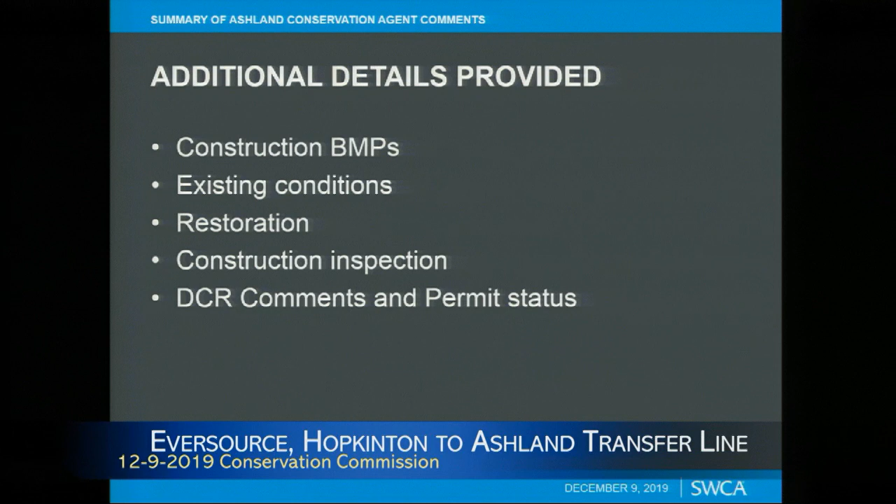So with that, I'll start off with the construction BMP side of things. When we last met, there were many questions about how construction was going to take place within some of the wetter wetlands, specifically the wetlands around Cold Spring Brook, and the wetlands between West Union Street and Ashland State Park. There are two larger BVWs with associated floodplain areas there.

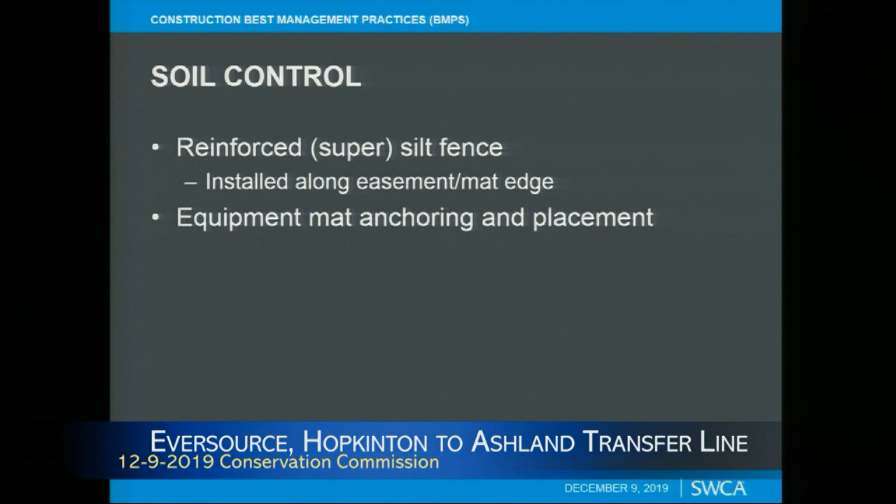So we went back and looked at some different BMP measures, and what we came up with was the use of reinforced silt fence, along with the continued proposal to mat the work area, using this reinforced silt fence to form a more rigid structural edge to the workspace that would be installed right at the edge of the mats, right at the edge of the workspace easement, to provide the maximum amount of retainage of soil within the work area and on the mats. We also addressed some questions related to how those mats would be placed and the anchoring of those mats within the easement.

I thought it would be helpful. Last time we talked to the commission, there was a request for some photography to show some of these items, so I have some photos for you to give you a sense of some of these particular BMPs. This photo shows what this reinforced silt fence would look like.

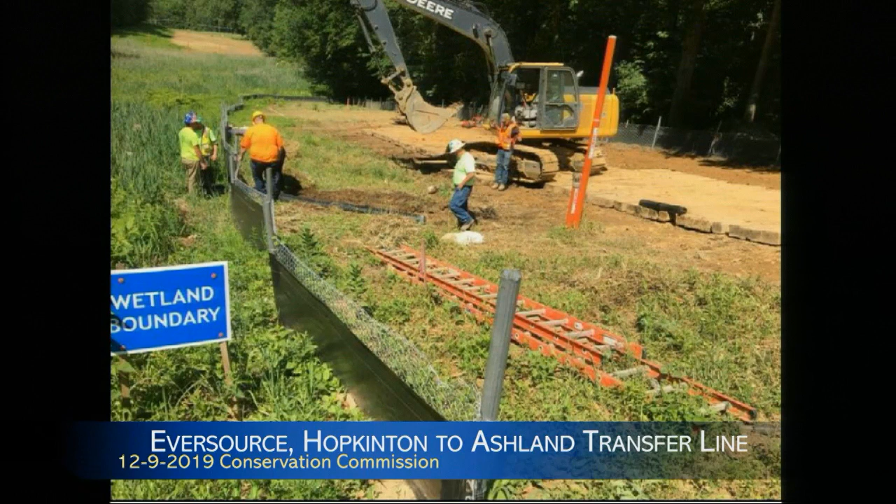It's basically taking a taller silt fence and attaching it to a chain link fence at a low level, but giving it rigid reinforcement, and that would be laid in right along the right-of-way. This particular photo is from a different project, but it was an installation of super silt fence along a pipeline right-of-way. In this instance, it was used because this crossing was in bog turtle wetland habitat, so it was important to provide a very definitive barrier to keep wildlife from moving in and out. This photo shows installation of that super silt fence along with some mat placement.

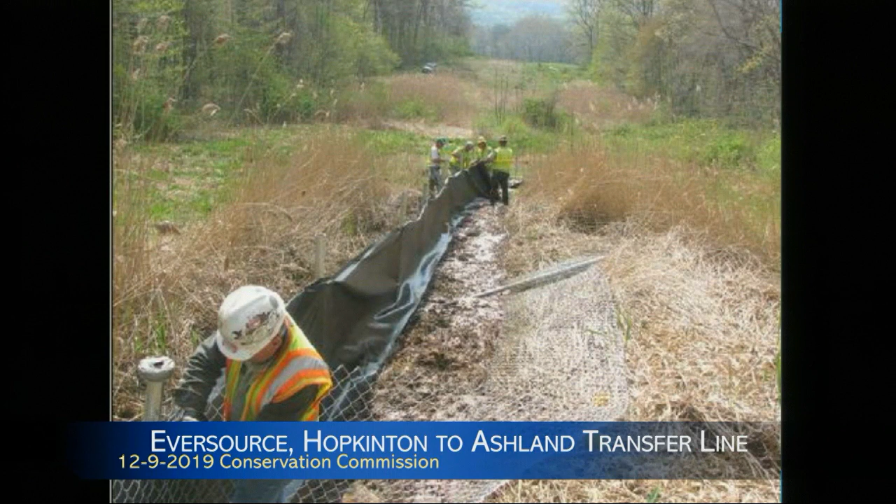This is another photo showing the laborers actually putting the fencing in along the edge of the wetland workspace. Finally, this is after the installation has occurred, defining the uplands and the wetland areas along here, showing the BMP usage within this easement. In this case, this is a large, pretty wide pipeline easement.

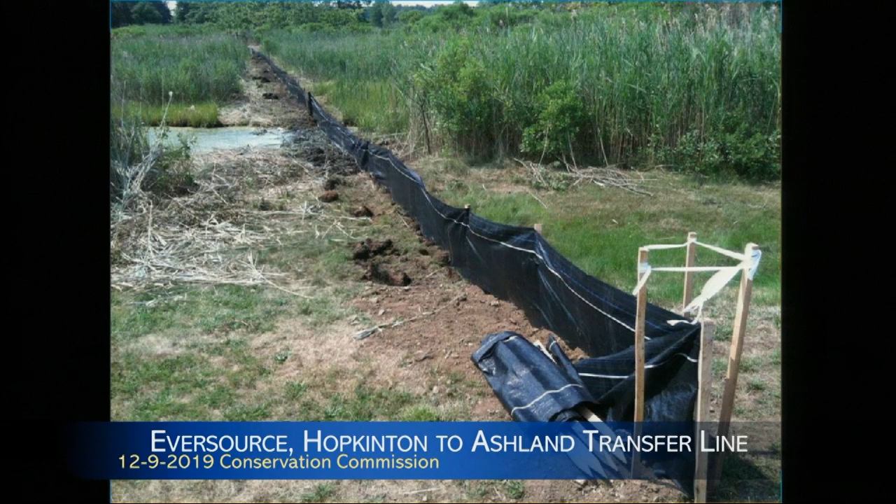I put this photo in here to show normal silt fence installation, but there were questions about whether this could be installed in wet areas, really wet areas. In this case, this was going through a marsh habitat, and the silt fence was being installed through there, so that's why I put that one in.

Now, one of the other questions that came up from the previous hearings was about past construction, and Sean, the project engineer, was able to go back into the archives and dig out some photos from the 2002 timeframe, when there was a beginning segment of the transfer line in Hopkinton that was installed as 12-inch.

So I just want to touch again on the use of equipment mats. I know there's many questions about that. We consider it a standard BMP for constructing linear projects in easements to avoid rutting up wetlands, and from the equipment, providing a safe, stable platform for which the equipment can work from.

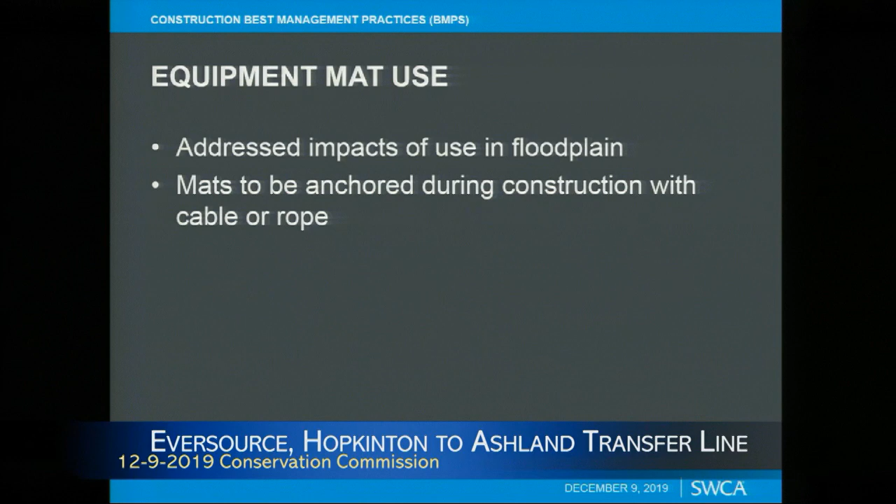And then other questions came up, well, what would you do in the case of flooding? It's typical to anchor mats, basically lashing them together to keep them tight, and then you can actually secure them to a tree if you think there's going to be some significant surface flooding that's going to occur from a storm event.

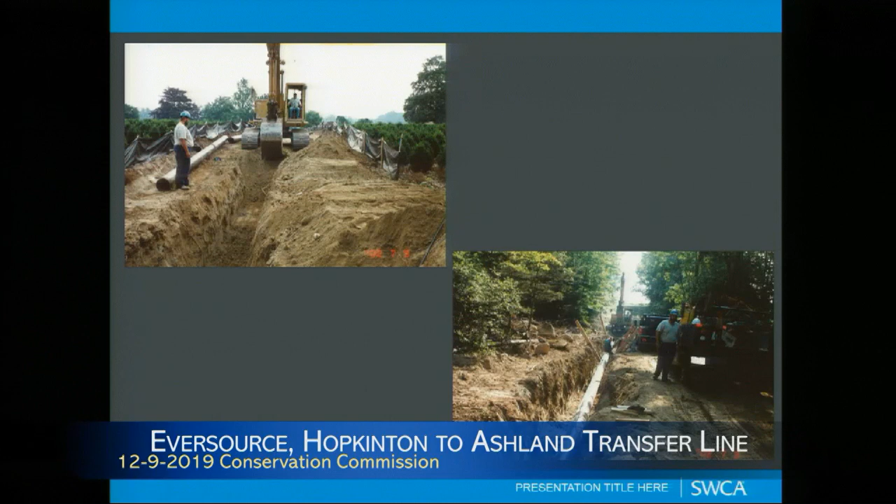Is this an example of working within a 20 to 30 foot easement? No, not this. Let me just go back. These photos do - this is the width of it, was 20 feet in this section, 20 feet wide in this section of the transfer line that they were constructing within, right here. So this easement, I actually don't know the dimensions of this, but it's certainly wider than 20 feet.

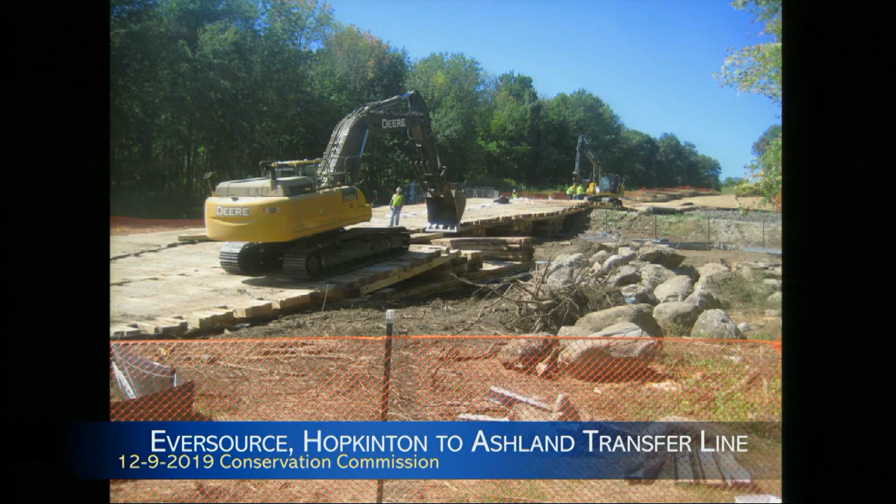This is another example. Again, it's a larger right-of-way. This is transmission line right-of-way where there's 2-3 pipes within the easement. So the easement width is actually, in this case, is probably more like 75 feet wide. Could be up to 100 depending. But again, just showing how mats are built out across streams and wetlands, forming an equipment bridge to provide that support.

The fencing that you have, you're going to lay it down all through the project first and then do the job, or you're going to start fencing each section and do the work? As far as the silt fencing, that would... whatever the other fencing also, because that's going to divide the land for habitats to move around from one side to the other. So you're going to restrict them from moving. If it's going to be a smaller section, it's okay, but if it's a larger section, they cannot travel miles long to find out the path to go to the other side.

Yeah, you are correct. In laying out silt fence, it can work as a barrier to wildlife, because basically something's going to come up to it. If there's no opening, it's going to go one way or the other. Whatever the lateral movement that they have should be minimized enough so that they can do their daily job, whatever they do, as best as they can, rather than traveling miles together on both sides.

Right, understood. In this case, we haven't figured the exact linear feet of barrier that'll be placed at one time, but most of the wetland crossings are smaller. The bigger crossings, the goal would be to lay the fencing in there, before the actual work started up.

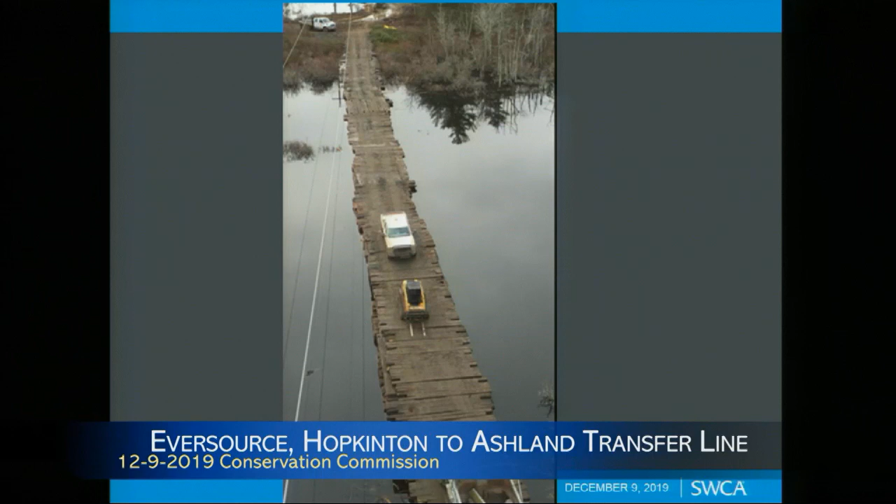These next two photos are just showing some more mat placement. This one is in an electrical transmission line right-of-way, but again, just trying to provide an example of matting use in a flooded area such as this. And a little more extreme, this one was an open water mat crossing of an electric transmission line to provide equipment access from one side to the other. This was a stacked mat situation here.

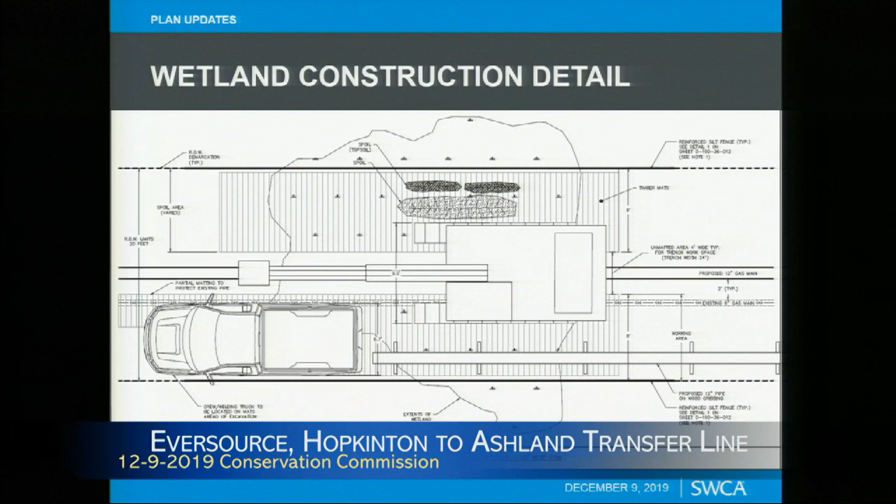So with that, I'll move into another topic area we've been working on. We've received comments from Matt and Megan on the commission as well on the construction details, to provide additional details as far as dimensions of equipment, to demonstrate that these are to scale, representing what a standard backhoe or a standard pickup truck would consist of. So those details have been added to the permit package, and we've shown the widths of the various pieces of equipment within the easement that would be working on construction. We've got the details for the 20-foot right-of-way, and another one for the 30-foot wide easement as well.

An additional request that came from our technical review meeting was to provide a detail of a less-than-optimum configuration of the pipeline construction. The other two details showed the pipeline centered for the most part within the easement, with distribution of workspace relatively similar on both sides, whereas this one shows a situation where the actual pipe is closer to one edge than the other, and shows how that would be addressed from a construction standpoint. That was done for both the 20 and the 30-foot construction work areas.

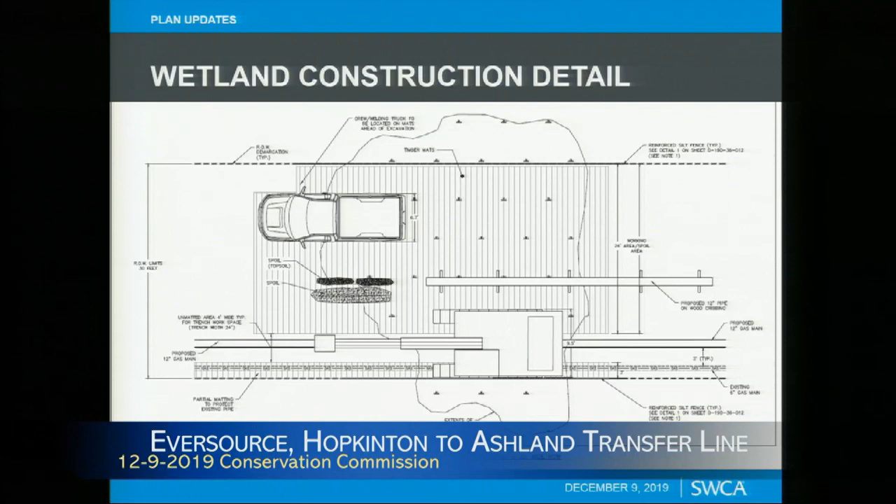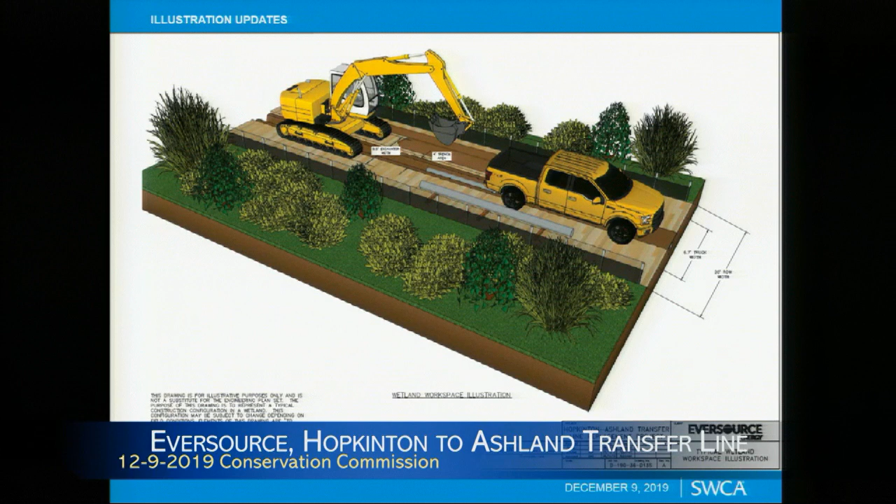We've also done the same thing with the illustrations, adding the dimensions to the vehicles from the last meeting and the equipment to the actual illustrations. And it's two different views that we had presented.

Along the same lines, we've done the same thing with comments addressing the water body construction detail to show how the workspace would be laid out to cross streams, the way that a dam and pump operation would be set up in terms of equipment, the dam location, the equipment bridge, and adding dimensions to that, getting that drawing to scale, which was a key comment that we had received.

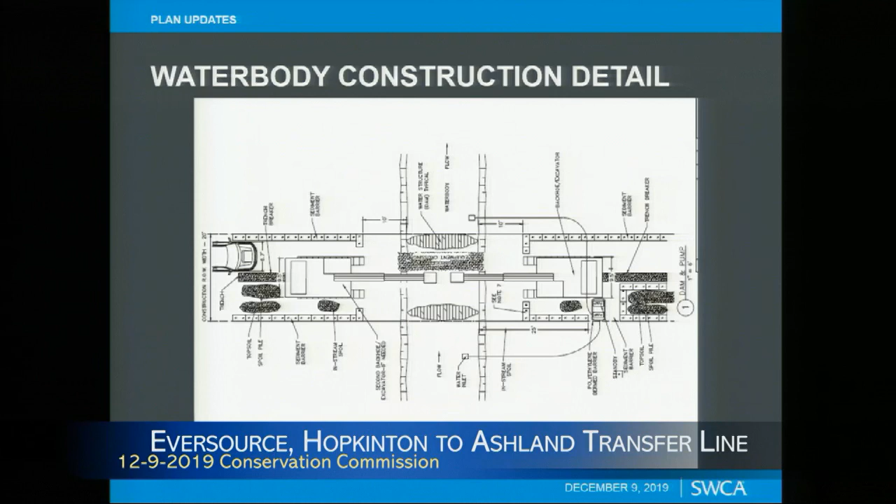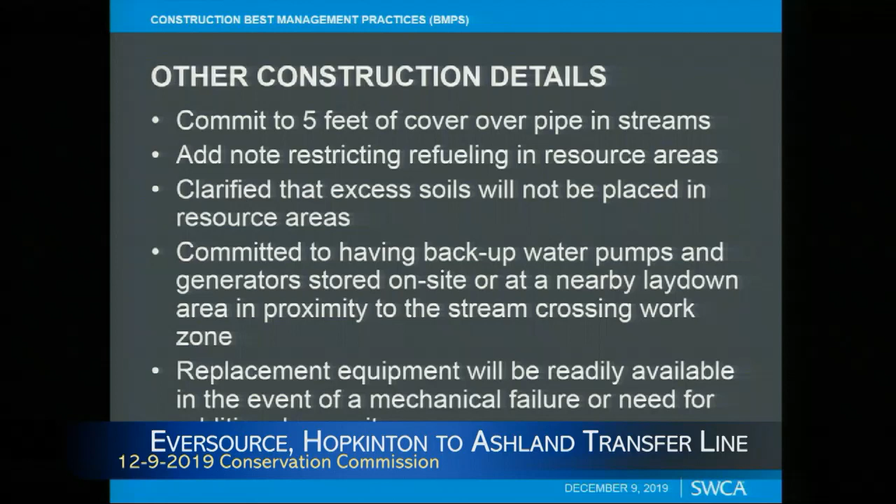In addition, there's a number of other construction details we addressed in narrative fashion as well as on the drawings, having to do with the amount of cover over the pipe within streams, distances to refueling and adding notes to keep refueling operations out of resource areas, clarifying that excess soils won't be placed within resource areas, and committing to having backup water pumps and generators on site or in nearby laydown areas so they can be easily accessed if a current generator or pump breaks down and needs to be replaced quickly. That's been added in terms of notes to the construction drawings.

Question here: You did mention about cleaning the mats as you go along so that you don't have to carry the debris from one place to another. So are you going to get water from outside, or are you going to use the local resource? Did you want to address that one in terms of mat cleaning?

Would you mind repeating the question about mat cleaning? You had indicated that you're going to clean up the mats as you move along with water. Yes. So that water, that source of water, is it from outside or from the same area? I assume you're referring to before we take mats off-site and relocate them, how we would clean them. Correct.

So there's actually different ways it can be done. One way is using water, some type of water source. Typically we'll have a water truck on site for dust control, and sometimes we can repurpose that by washing mats before they leave the site or before they go into another wetland. Sometimes if the mats are permanently leaving the site and we're done with them, we won't wash them there because they're washed back at the mat yard, back at the contractor's yard.

Another method we can use is compressed air. If there's some type of air on site, we can use that to blow any remaining seed or rootstock off the mats. Does that create more dust? Not significant, unless it's a very dry day, and you're not talking about kicking up plumes of dust. It's maybe a small amount, limited to the area you're working in, and it doesn't travel very far typically.

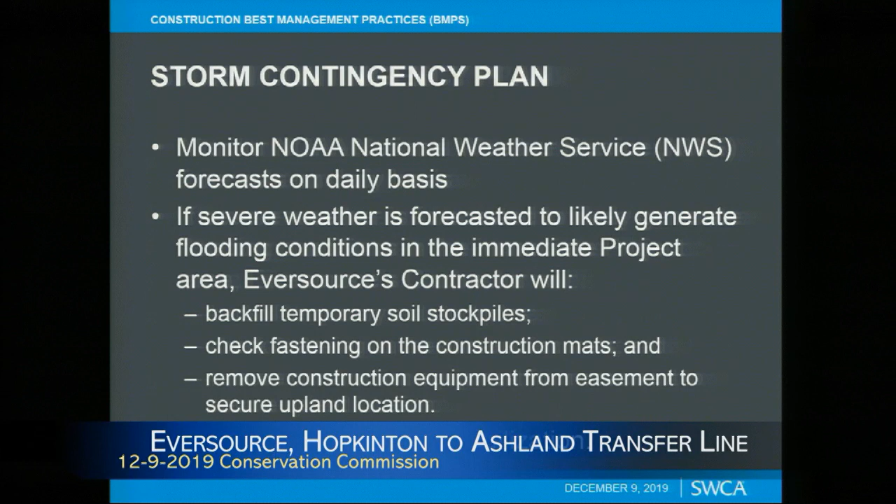So, a few other items I'll walk through. Responding to comments, one question was what happens if you've got a wetland matted up and a big storm is coming with potential flooding. The contractor would be responsible for monitoring weather forecasts daily. If severe weather was forecasted that would create flooding conditions in those two floodplain areas, a number of steps would be taken: all backfilling done, putting stockpiles back into the trench, all mats fastened and checked for tightness, and construction equipment pulled out of the easement to a secure upland location. That could all be done within one day as a temporary demobilization of the site. That's the plan for addressing potential flooding events during construction.

Other items brought up for commentary included a request to identify areas of shallow groundwater where dewatering might be necessary, without the ability to actually build out test pits. We looked at NRCS soil data to identify soil types with shallow groundwater classifications, and projected that into the easement. About 48% of the project area is listed as having shallow groundwater, and most of that, unsurprisingly, is within the wetlands we cross. We provided maps showing where those specific soil types with shallow groundwater were located in the project area.

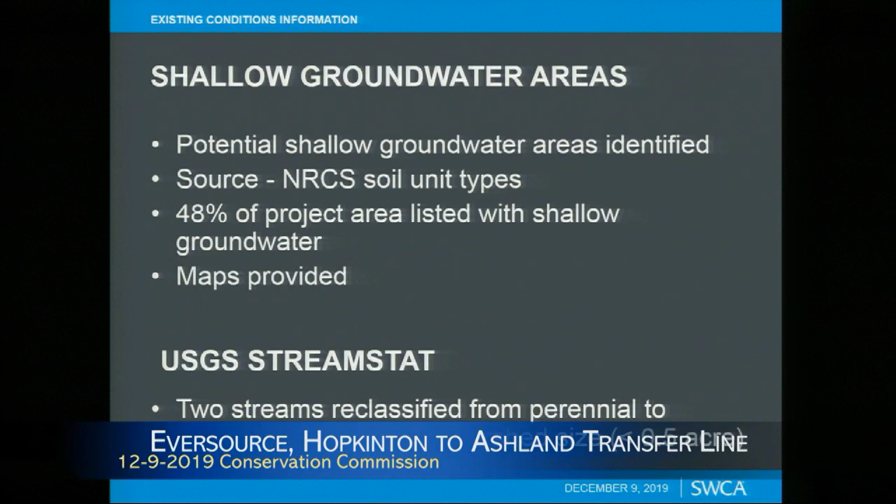We also refined the classification of two perennial streams that were conservatively labeled as perennial. With comments from Matt and Megan, we reviewed the stream stat data and reclassified two of them as intermittent because they didn't meet the half-acre watershed size. But the construction methodology from our standpoint is still the same for those stream crossings.

We also conducted a tree survey within the easement.

I'm sorry, Mr. Paquette, could you back up to the previous slide? Where are those streams located? One is located where the exposed pipe is at Brimstone, at the end of the cul-de-sac. The other is a small drainage within the larger wetland east of Metropolitan, a very narrow stream crossing within there. How many stream crossings are there at Metropolitan? There's that one, and then the Cold Spring Brook, the actual major crossing there.

Is this one, if you're questioning the watershed size on this one, is that where your line of questioning is? Well, we've been involved in a lawsuit regarding the requirement of the 0.5 acre threshold and whether that's arbitrary or not. There are some streams that we know are perennial because they run all year, but under USGS, they're still called intermittent, and we think that they're perennial.

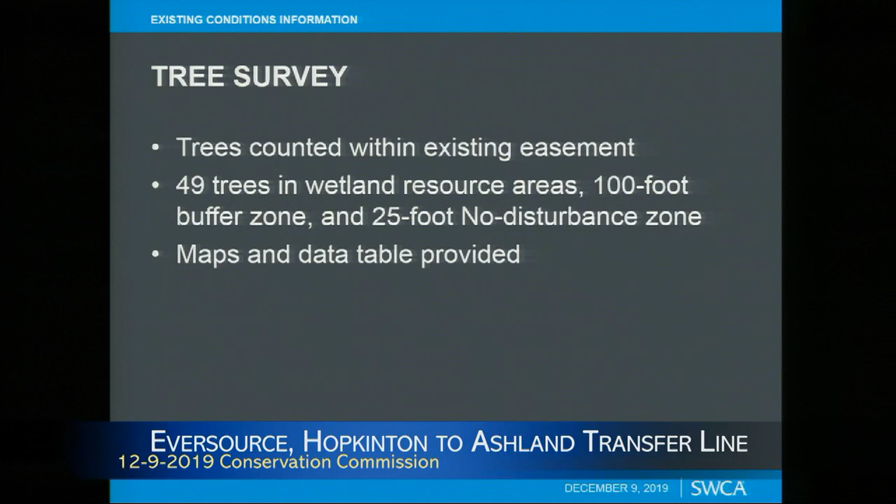Sorry, just to provide a little clarification on that too. We had asked for that extra column on whether it's in resource areas or not, within your jurisdiction or not, thinking the commission could better quantify the impacts within the jurisdiction. So if you were thinking of any requirements for mitigation for the loss of those trees, you'd have real numbers to go by in considering what mitigation might be necessary.

Thank you. Just to go back, so that I have this straight and everyone else does too, maybe I'm the only one a little confused. The streams were designated as perennial by USGS? And then you guys applied stream stats and determined that they were intermittent? No, no, Rick, do you want to address that?

So the field biologists originally identified them as perennial when they delineated the wetlands. Then, with the additional comments we received, we went through the stream stats analysis based on the riverfront area regulation in terms of the half acre and the stratified drift and all that. Coming out the other end, those 2 streams do not meet the perennial classification based on that particular regulation.

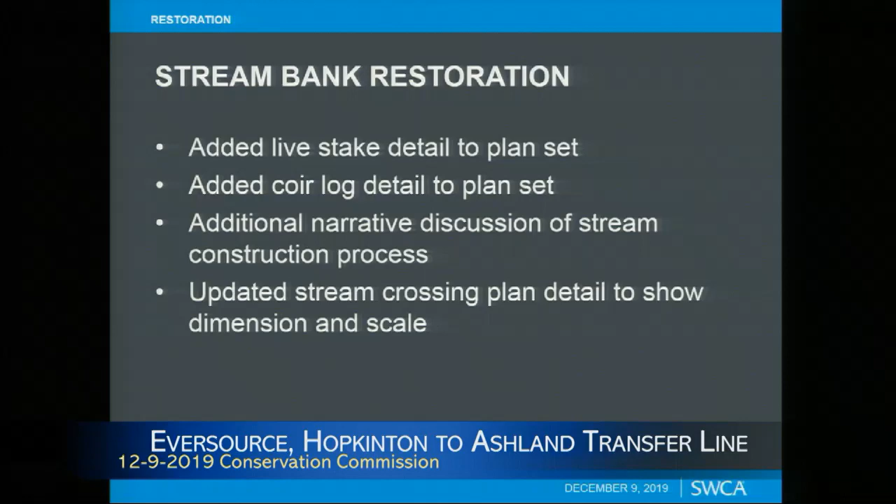And then we provided some additional plan details to show the dimensions and the scale, and I actually showed you that one before for a typical crossing. And again, this is another pipeline project where they crossed a stream and had restored the area along the bank using a combination of the BMPs that we discussed, just to give you an idea of what that might look like.

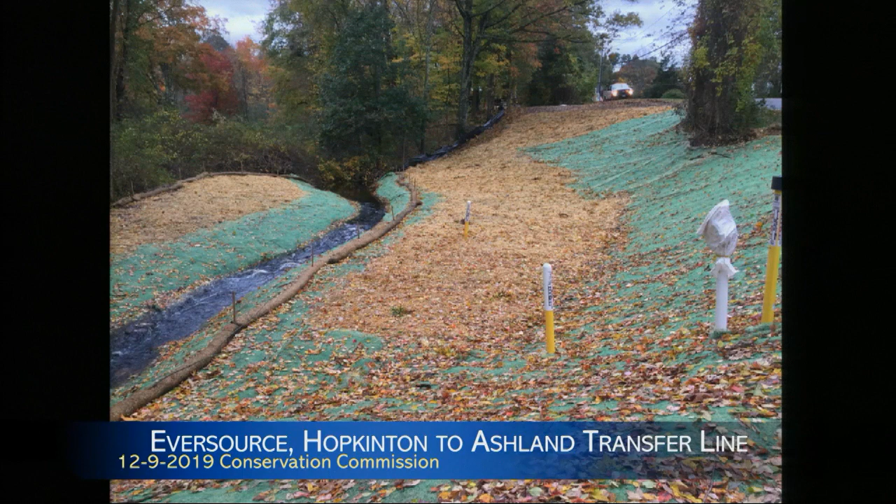Another topic had to deal with the restoration seed mixes. Matt Verrill had recommended the use of a nurse seed mix to get quick stabilization in the soils - a fast-growing annual rye is what we propose to use in combination with the traditional wet mix, the wetland seed mix that would be used to restore the disturbed soils. So the annual rye would get that soil locked down while the other seed takes a little bit longer to get going.

We also provided an invasive species management plan, and we submitted that back in October, and then updated it more recently last week to address some additional comments from Matt and Megan. That plan basically involves a survey that we did in July of 2019 - we walked the easement and identified areas of invasive plant species populations all throughout the right-of-way in the resource areas, and generated maps and tables from that with the data.

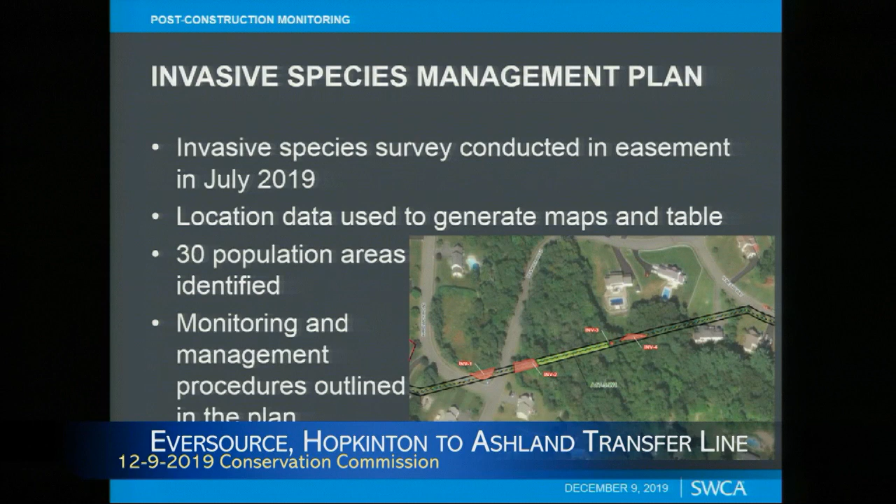We identified 30 population areas, and the plan laid out the monitoring and management procedures that we would follow. These are the most common species, no surprise, very common in the area - bittersweet, multiflora rose, the shrub honeysuckles, barberry, buckthorns, pretty prevalent out there. A little bit of loosestrife, common reed in some areas, and then some reed canary grass.

And the goal for the invasives plan would be to control the spread - basically keep it in check, make sure it's not spreading into areas where it wasn't before within the easement. So that's the overarching goal of that. There would be post-construction monitoring to basically ensure that that's not occurring, and if it is occurring, we have management measures in place.

The first line of defense, if you will, would be to do mechanical methods - hopefully get out there quick and be able to pull, hand pulling, digging, cutting, that kind of thing. If that didn't prove effective, then chemical measures would be considered to try to eradicate the invasives as well, but that would only be done on a site-specific basis.

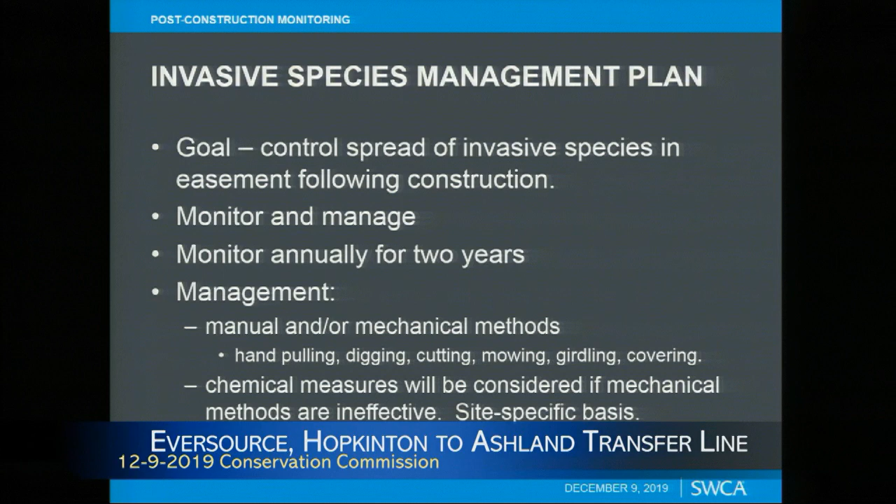DCR has provided review comments. We had responded to those back in October, and I think Nat Tipton at DCR had come back with follow-up on our comments or responses. Nathan Tipton is with the state, through the Department of Conservation and Recreation, which oversees these kinds of projects going into DCR lands. Those comments were forwarded back to Eversource, and where it stands right now I'm not sure. I haven't had a chance to look at it, but I know I sent it to you. I recall he was satisfied with the answers we had provided.

I did want to mention too, one of the comments was the Article 97 status for the easement within the state park, and that continues to occur in the background, with a draft bill being submitted, I believe, in January of this year, with a legislative vote scheduled in July of 2020. That process would continue on. DCR has indicated that could work its way through the system concurrently with the project moving ahead with construction.

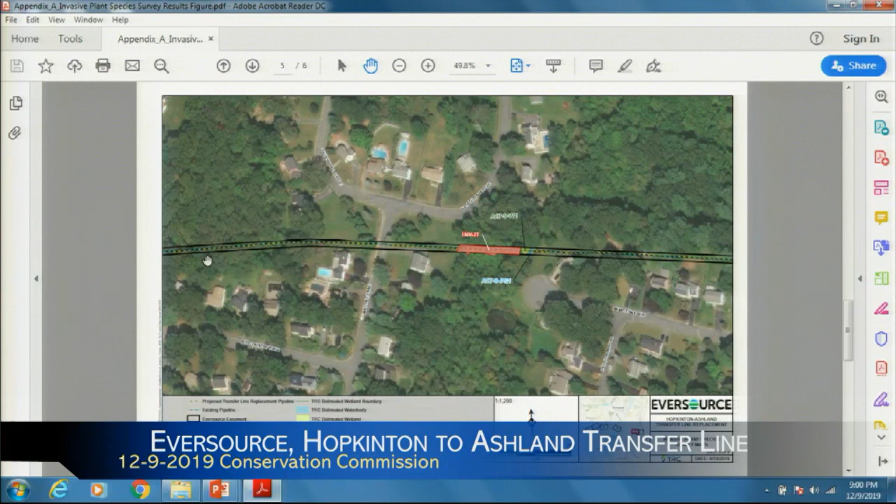And where is 135? That's not it, is it? It jumps to the next one, so it's not total coverage of the easement, it's only focusing on the wetland areas. Okay, can you go back to the first one, wherever it was, where you said? First one. No, oh, I'm sorry.

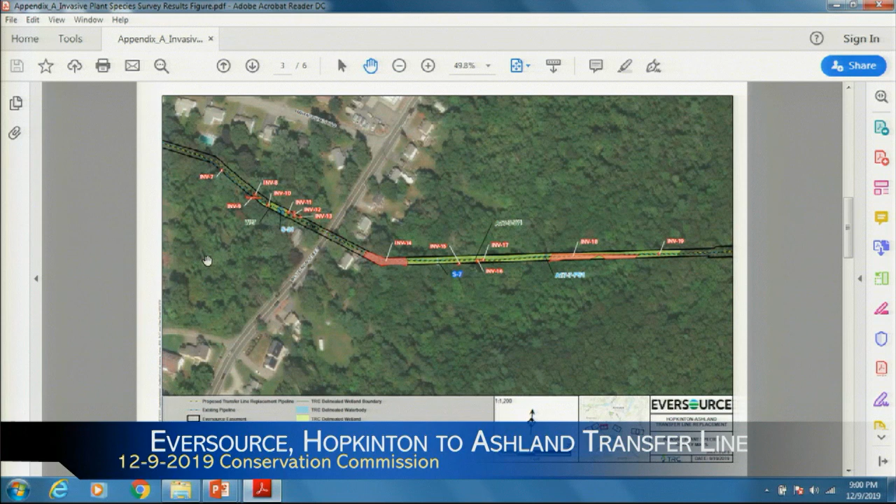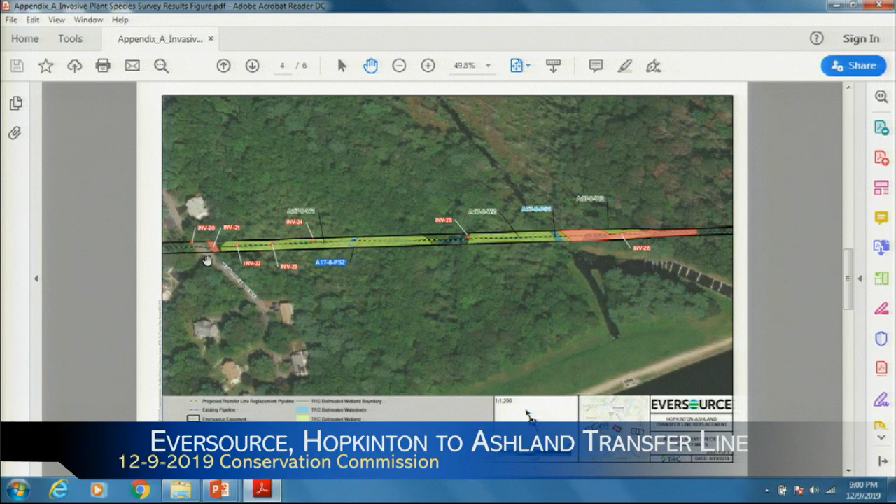So, you're going from, if you still have your pointer, you can point where 135 is, and then you're going all along that area, all the way to Chestnut Street, which is probably a mile. And the only thing in between, now if you go back to the other slide that has Metropolitan Avenue in it, the only thing between Chestnut Street and 135 is Metropolitan Avenue, and you're in a 30-foot easement.

And on Metropolitan Avenue it's like a cart road, and you can't be on private property, and you can't be on the road. So where would the staging operations be for all of this, from that area all the way to that area, including refueling?

Because it seems to me that there needs to be some kind of a major staging area that's relatively close to what's going on in order to coordinate what you're talking about. And I'm not just asking you, I'm asking anyone in your group. Have they been identified?

So it would be a staging area for construction and a staging area for refueling, maybe, if you're not going to refuel in the field. At this time, we haven't identified specific locations other than we've committed that we would not refuel in a jurisdictional area. We will have a laydown area somewhere outside of the immediate project construction zone, where material, piping, soil, and rocks removed from the site will be brought. We don't know exactly where that's going to be at this time, but we will have a site somewhere, whether it's in Ashland or Hopkinton, there will be another site nearby.

So you will monitor your equipment so that you will have enough fuel to get it out, and get to the refueling site legally, yeah. Is that a question? Of course. Okay.